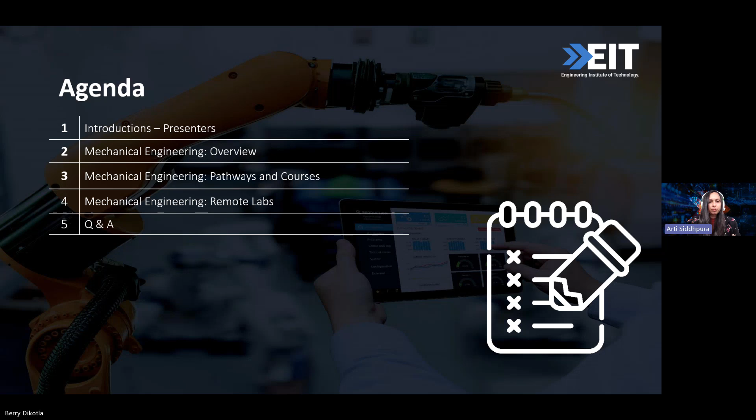Talking about myself, my name is Arti. I have been in academia for more than 20 years now. I have a PhD in mechanical engineering. I'm based here at the Perth campus of EIT, and my research interests are mainly about condition monitoring of machine tools, prognosis and diagnosis of tool life, and smart manufacturing and automation.

Over to you, Dr. Arvin. Hello, everyone. My name is Dr. Aravin Arumugam, and I am also a mechanical engineering lecturer, and I'm actually the program leader for the vocational education training here at EIT. Thank you.

Okay, hello everyone, welcome to this session for mechanical engineering. I'm Dr. Milind, one of the course coordinators and a senior lecturer at EIT. I'm also based in Perth. I've got a few years of experience in academia and industries, and I did my PhD in mechanical engineering, and I'm actually looking after bachelor's, master's, and doctorate programs in a way for EIT. So that's me. Welcome all.

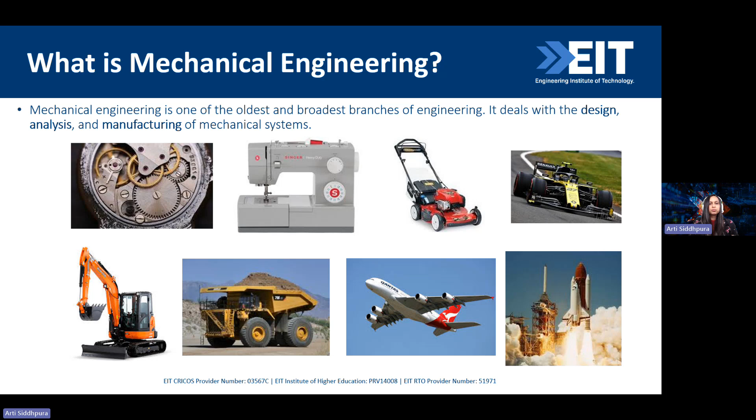We also need to have knowledge about manufacturing engineering, that is what different machines are and how they can be used for various different manufacturing processes. Mechanical engineers also need to have knowledge about engineering design, how they will design the parts and components so that they can withstand the given forces and stresses. They also use computer-aided design and simulation. Mechanical engineers also need to have knowledge of control systems, power and energy systems, kinematics and dynamics of machines. They also need to have some knowledge about robotics and mechatronics, heat transfer, and instrumentation and measurement. So these are some of the key knowledge areas.

As I already mentioned, mechanical engineering is a broad umbrella, it's a broad field, and quite a few different applications and branches sit under mechanical engineering. So we will go into a little bit of detail of all this one by one.

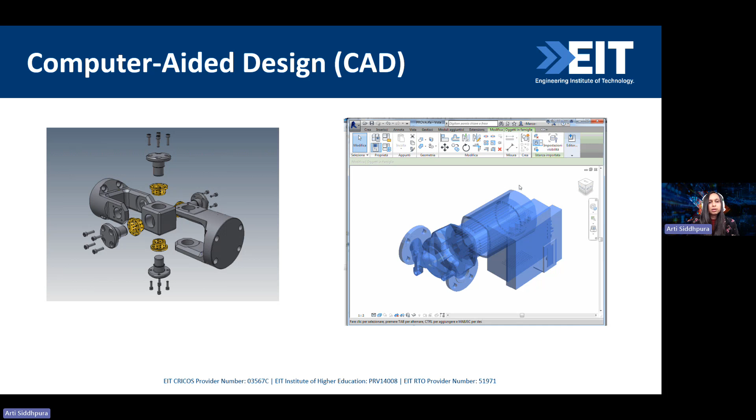Moving on and starting with computer-aided design. Mechanical engineers create detailed plans and blueprints for mechanical systems and products. Those sort of things involve selecting appropriate material, specifying dimensions, and ensuring system functionality, etc. So in doing all those things, computer-aided design software comes in really handy. They use these CAD tools to design everything from buildings to automobiles, helping them visualize the products, test the performance, and make necessary adjustments even before any physical work can get started. So that is computer-aided design.

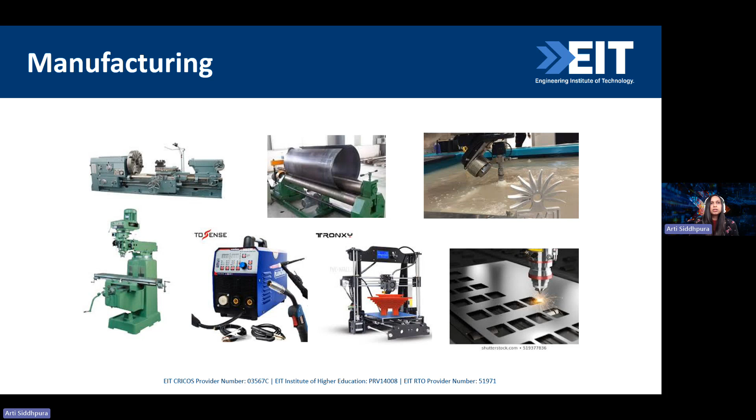Moving on, next application is manufacturing engineering. Manufacturing engineering is the process of turning raw material into finished products. Manufacturing engineers focus on how the products are made, ensuring that they are created efficiently and at very high quality. They also look for various different ways to automate and streamline the processes to save time and reduce the cost. Imagine an assembly line where robots and machines are working together to build a car. Engineers make sure that the entire process is very smooth, efficient, and produces really high quality vehicles. So that is manufacturing engineering.

And as we have been talking about cars, the next application is automobile engineering. Automobile engineering is a field where engineers specialize in designing, developing, and testing vehicles. This area is all about making cars safer, more efficient, and environmentally friendly. It's not just the cars which use fossil fuels, electric cars to advanced driver assistance systems, all those things are included as a part of mechanical engineer's job. So think about the electric vehicle you see on the roads today. Behind the scenes, mechanical engineers work on the engines, the batteries, and even aerodynamics. Now you should be able to see how various different key knowledge areas come into the picture. They need to select the most suitable material, design them so that they can withstand the forces, and again aerodynamics, thermodynamics, and fluid mechanics also come into the picture. So that is automobile engineering.

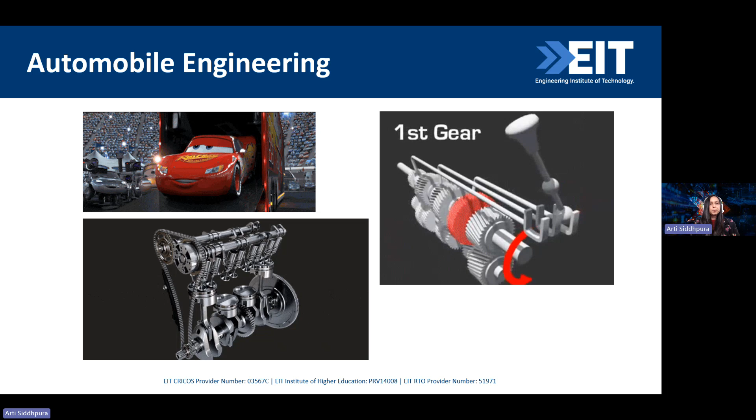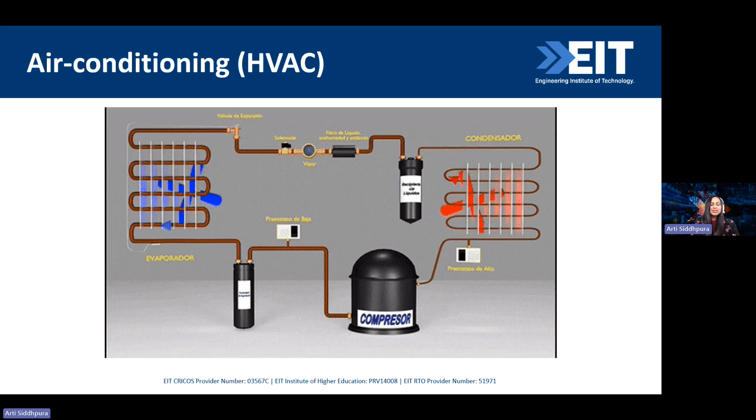Moving on, the next is air conditioning, or we fondly call it HVAC. HVAC stands for heating, ventilation, and air conditioning. Air conditioning engineering is a vital field, especially in our modern world where temperature control is very crucial for both comfort as well as for some industries where they need to maintain a certain temperature. Engineers design these HVAC systems to regulate temperature, humidity, and air quality inside homes, offices, even inside industrial plants. So when you walk into a cool building on a hot summer day, or when you walk into a warm building on a cold winter day, thank the engineers who designed the system that keeps you comfortable. So that is air conditioning and HVAC.

Moving on, materials. Materials are everywhere, and as engineers, when we start thinking about new products, we also need to start thinking about materials simultaneously. What sort of material are we going to use? Sustainability is another aspect now being added to material selection. So engineers have started doing an entire life cycle analysis, or if you like to call it, a cradle to grave entire cycle, starting from getting the raw material all the way to processing, converting that into the product, and all the way to disposal of that product.

So material engineering is where mechanical engineers work with various different types of materials. Those materials could be metals, plastics, composites. Every day, new materials are being invented; they are coming up with quite a few new materials every day. Material engineers focus on choosing the right material to create strong, durable, and efficient products, whether it's for buildings, vehicles, or even electronics. Everything requires material, and then all the engineers need to think about the properties of material - what properties are needed in order to make into a successful product. So imagine building a bike. Engineers choose materials that are lightweight, but again, strong enough to handle the rider's weight and the bumps on the road. So that is an example, a simple example of material selection.

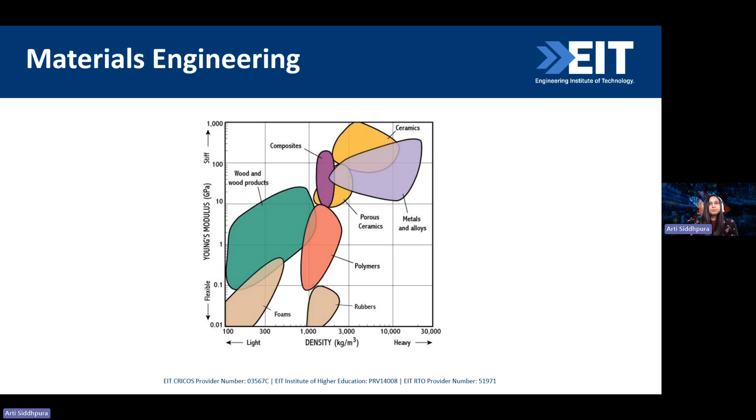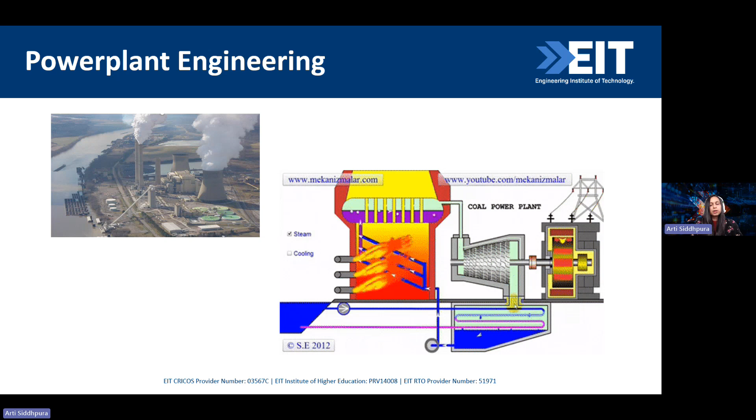Next one we have is power plant engineering. Power plant engineering focuses on generating energy. You might think power plants are more about generating electricity, but what do mechanical engineers do here? It's all mechanical engineering at the back end—whether it's a steam turbine or a normal turbine in a hydropower plant, it's all mechanical equipment. Engineers in this field design and operate power plants, whether running on fossil fuels, nuclear power, or renewable energy like wind or solar. This work ensures we have the electricity needed to power our cities and homes. So the back end is more or less mechanical.

Next is mechatronics and robotics engineering. This is a blend of mechanical engineering, electronics engineering, and computer science. Engineers in this field design robots and automated systems used in manufacturing, healthcare, and even exploration. Robotic vacuum cleaners are a very good example of what mechatronics engineers create. They design machines that can do tasks which are too repetitive or too dangerous for humans, and that's where robots and automated machines come to the rescue.

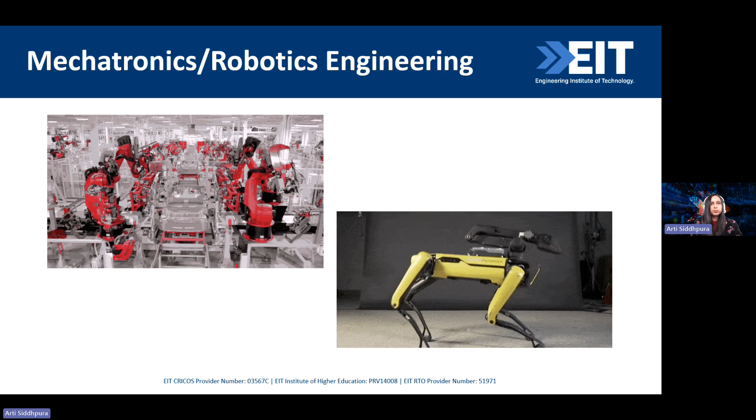Next one we have is agricultural engineering. You might think agricultural engineering has a lot to do with plants and crops—how would mechanical engineers play any role in this field? Agricultural engineering is an important area where mechanical engineers can work on improving farming equipment. Take Australia as an example: it has vast farming lands but very little manpower, so a lot of automation is required, where a single person can handle processes that would otherwise require a huge workforce. That's where mechanical engineers come into play—helping improve farming equipment, irrigation systems, and even the food processing industry. They can develop technologies to increase food production while reducing labor and environmental effects. So that is agricultural engineering.

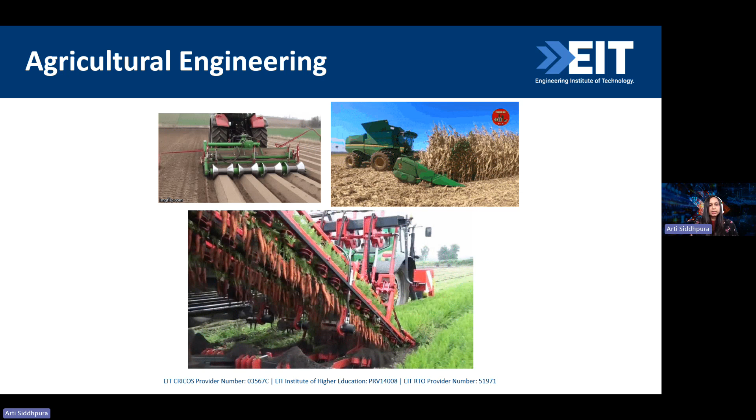The next one we have is mining engineering. It's quite distinct in its focus on the mining and extraction of minerals and resources. It's not exactly mechanical engineering, but it definitely shares fundamental principles with it. Mining engineering covers the design and operation of mechanical systems used in mining—drilling rigs, crushers, conveyors, material handling equipment—all have mechanical engineers behind them, whether designing, improving efficiency, or operating these instruments. Mechanical engineers design and manage equipment used in extracting minerals and resources from the earth, with a main focus on making mining processes safer, more efficient, and less harmful to the environment.

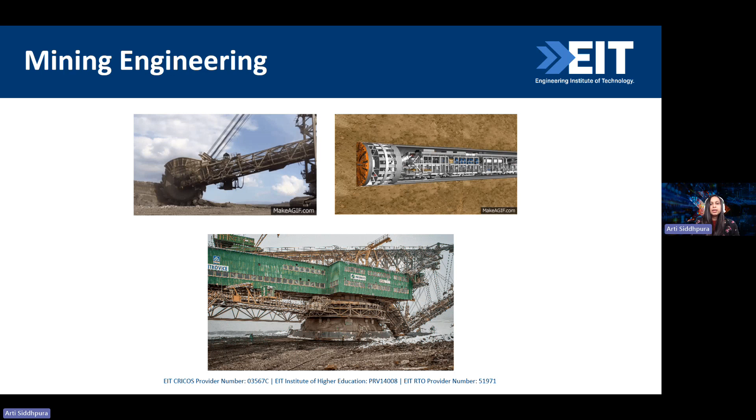Next one we have is oil and gas engineering. It involves designing systems to extract and transport oil and gas. Mechanical engineers in this field ensure that pipelines, drilling rigs, offshore platforms, and the numerous pumps and compressors used in oil and gas rigs, along with refineries, operate smoothly and safely, while also focusing on minimizing environmental impact. That is the key there.

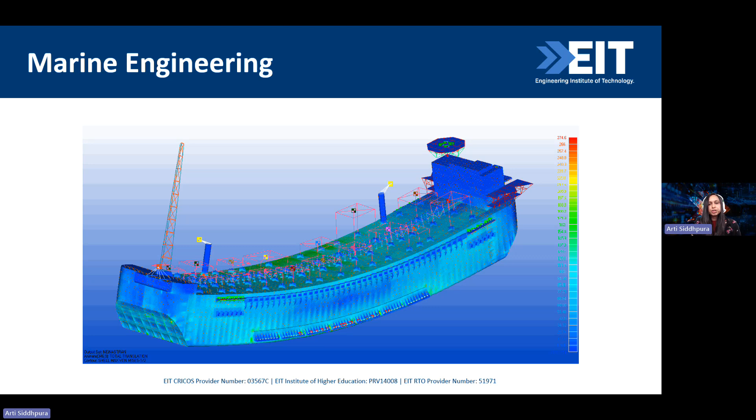All right, next one we have is marine engineering. This is the field where mechanical engineers work on the design and maintenance of ships, submarines, and other offshore platforms. They ensure that vessels and structures are seaworthy, efficient, and environmentally responsible—we don't want to pollute the oceans these vessels travel through. So that is marine engineering.

Last one we have is aerospace engineering—a field where engineers design and build aircraft and spacecraft. They focus on making planes safer, faster, and more fuel efficient, while also working on spacecraft that can explore beyond Earth. Many key knowledge areas come into play here: aerodynamics, fluid mechanics, thermodynamics, material selection, and design, all essential when designing a highly efficient aircraft or spacecraft. Spacecraft design is more challenging—imagine sending something to Mars, where you don't know what the environment will look like, what the temperatures or pressures will be. You can simulate it here, but once it's in the real environment, the outcome might be totally different. That's the application of mechanical engineering in aerospace.

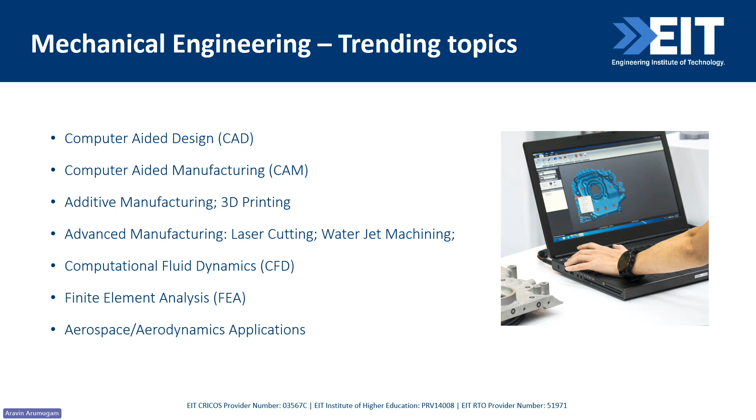All right, what else can you look into? Let's move on. Well, 3D printing. 3D metal printing, 4D. So we got this 3D, 4D. Now, obviously this comes as part of the, what they call this, generally the whole concept of...

Sorry, what is that? Can I have a quick look into? Sorry. All right, so 3D. So what's the difference between this 3D? Is there any sort of overlapping happening on the screen? Screen looks all good, you're on the 4D printing slide, Aravin. Is it? Okay, because it looks totally different. So can you just see the slides? Yes, yes, it's all okay, clear. All clear? Great, superb.

Okay, now anyway, coming back to what I was talking about, 3D, this whole thing about 3D printing. 3D printing is generally looking into creating complex structures using adding layers of material, layer by layer. So when you talk about materials, we obviously started off with polymers, and now we are also starting to look into metals and stuff like that. So we can generally build layers of polymers as well as metals in order to form any sort of products. So 3D printing is generally widely used.

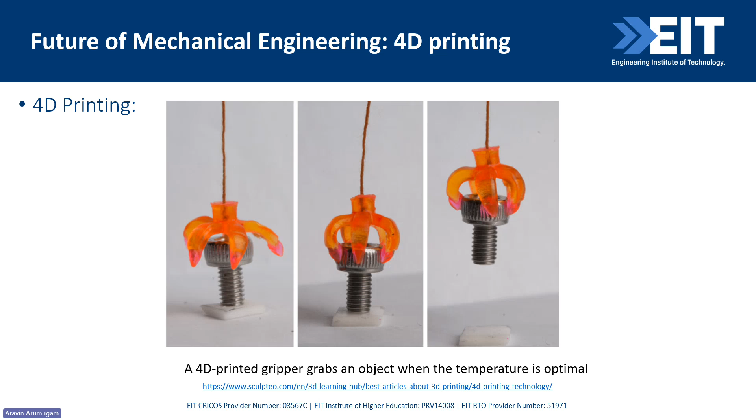All right, let's move on. So obviously the other part of it is computational fluid dynamics. Now this kind of falls under another big umbrella called computer-aided engineering. So we got computer-aided design, CAD, computer-aided manufacturing, CAM. So prototyping was in between those two. But prototyping used to be done in the olden days for testing purposes. Nowadays, hardly do we use prototypes for testing anymore because we have got these FEA type softwares that can do all this testing. One of them is computational fluid dynamics.

Computational fluid dynamics is a software that uses computers to predict liquid and gas flow using an equation called the Navier-Stokes equation. It relates the conservation of mass, momentum, energy, and so on. CFD simulation generally allows a designer to analyze the flow of air or gas so that they can optimize the design.

CFD is widely used in aircraft and automotive design. Another important thing is the integration of AI into CFD. With AI, these CFD models can be trained with historical data, so when developing another design, the AI can change the mesh, input, output, and so on, helping you optimize the design faster. So AI and machine learning are coming into CFD.

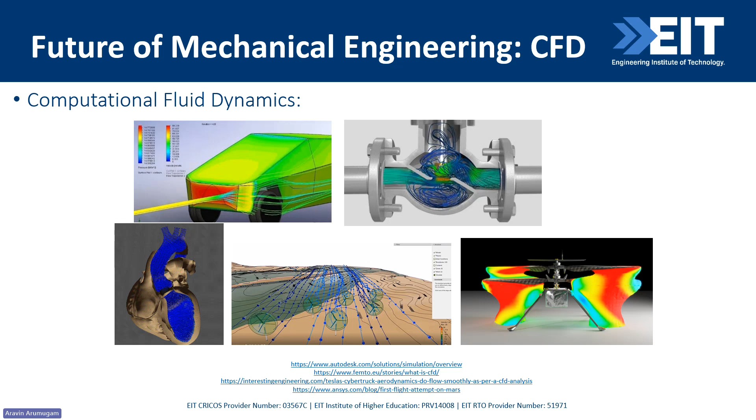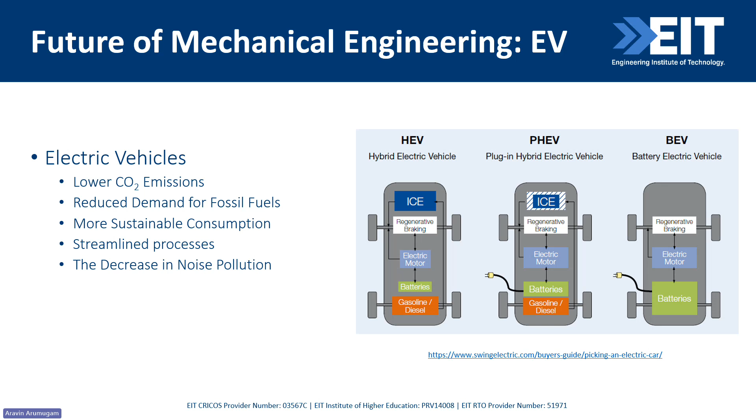What else? Let's talk about electric vehicles. Where do mechanical engineers come in, as Dr. Arti was saying? Mechanical engineers come in a lot with EVs because, as I said, they're needed anywhere there's transfer of energy. In EVs, you're talking about transfer of energy from electrical to mechanical and vice versa. So mechanical engineers are looking into the design of vehicles, designing the structures, the chassis, the suspension, the brakes. They are also designing and optimizing the powertrain involved in EVs. So that's where we have mechanical engineers again.

Nanotechnology is another thing Dr. Arti pointed out. Materials engineering is a big field of study in mechanical engineering. We have four engineering materials so far: metals, polymers, ceramics, and composites. But on top of that, additional materials are being engineered so we can incorporate them into nanotechnology, because we are already building components and parts that are quite small in size, in nano form, and we need materials for those kinds of things.

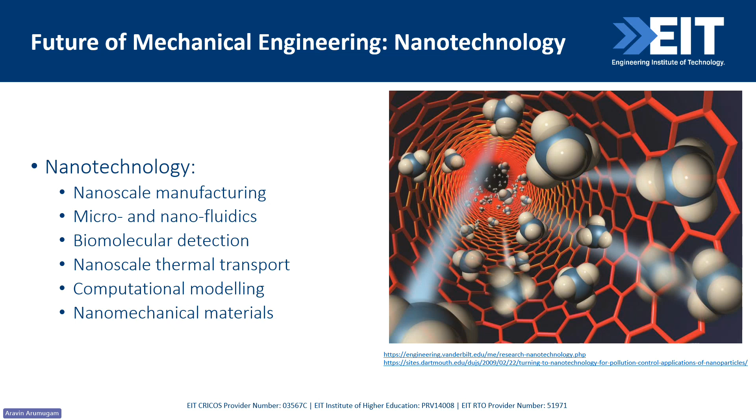Biomechatronics, something pointed out earlier, was a term coined by the Japanese. Mechatronics combines mechanical and electronics, but now we're putting both of these together with biology. We're looking into design of prosthetic arms, pacemakers. This requires a mechanical engineer, an electrical engineer, as well as another breed of engineers called biomedical engineers. They all have to combine together to look into biomechatronics.

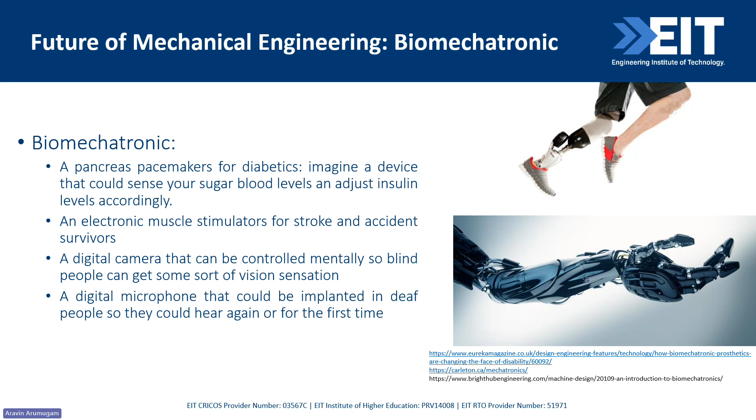Before finishing off, let's talk about Industry 4.0, part of the industrial revolution we're in at the moment. Going from Industry 1.0, 2.0, 3.0, 4.0, we're going through an advancement in technology. Industry 4.0 uses the Industrial Internet of Things, collaborating four things: connectivity with data, analytics and intelligence - that's where AI comes in - human interaction with machines, which is where you get virtual reality and augmented reality, as well as advanced manufacturing, which includes additive manufacturing, renewable energy, nanotechnology, and all this. We've joined all of this in Industry 4.0.

In fact, while I'm talking to you, we have actually gone into Industry 5.0. Industry 5.0 started in 2020, where we are talking about this collaboration between humans and robots. We are actually in Industry 5.0 instead of 4.0.

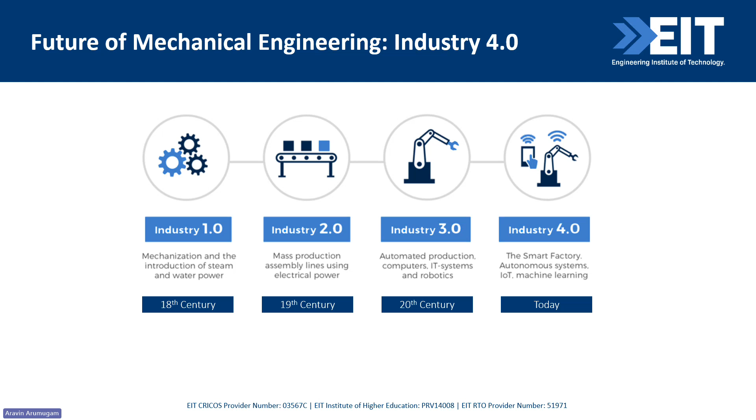Saying all of that, let me finish this off. There are some new technologies also we need to mention. The digital twin is in a way taking over the prototypes. Now we've got the digital twin, which is digitally formed, and that will tell you exactly how the actual product will look like. The input and output from the digital twin, and how it responds, can be used to change the actual system in terms of design and operation.

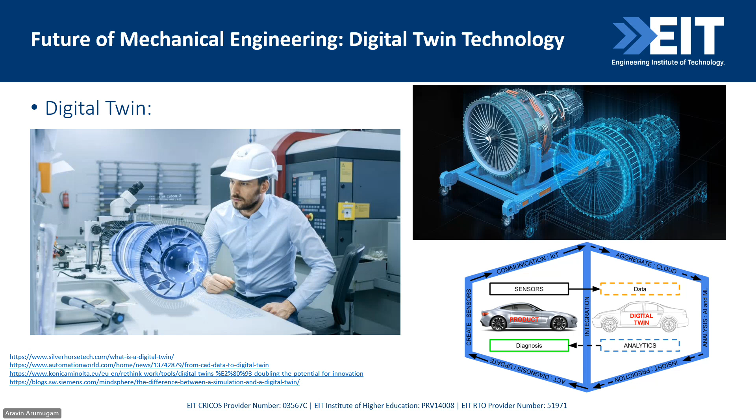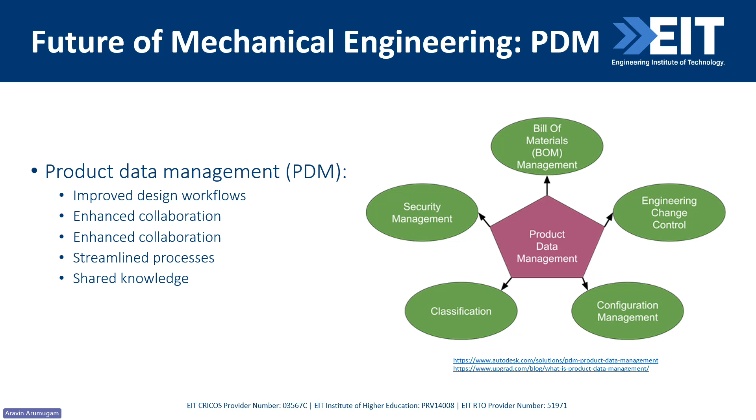Then we've got this integration of data, something mentioned by Dr. Arti earlier, how these various product data can be merged together seamlessly - PDM, as well as PLM, product lifecycle management. These are all very much software based. So to finish up, what's the future for mechanical engineers? The future for mechanical engineers is quite bright. It's very bright. There's a lot of things yet to be done.

We need to make transportation a bit more perfect - we saw SpaceX Starship recently with the vertical landing and stuff like that, a lot needs to be talked about there. Robotics also needs a lot of work, and machines for harnessing renewable energy have a lot to be mentioned as well. With all of that, I'd say mechanical engineering promises a lot of opportunities and prospects. So with that, I'll finish this off, and thanks for listening.

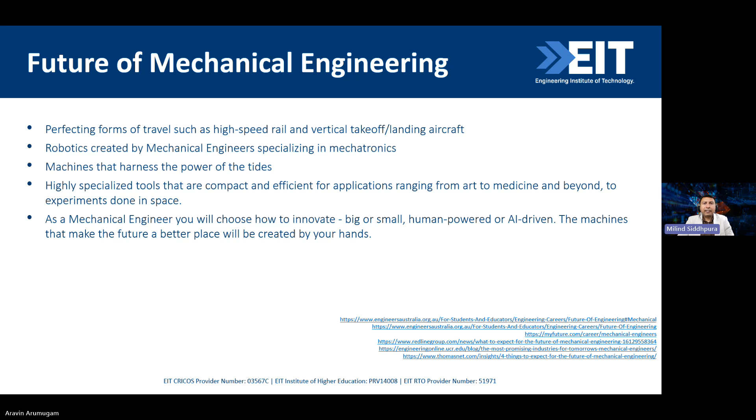I'm going to talk about the mechanical engineering courses you can pursue with EIT. Let me go through some of these courses - just give me a sec, I need to make this bigger.

Before I talk about the different courses at EIT, let me talk about the engineering pathways available. Anyone with a trade or technical qualification already working as a technician, for example, can take an advanced diploma if they have 2+ years of experience. Then there's a pathway to a bachelor's undergraduate certificate or a bachelor's degree, or they can go to a graduate certificate as part of a master's degree or a full master's degree, then a graduate diploma. We also offer the highest qualification, Doctor of Engineering.

So there are multiple pathways - either you could do year 12, then bachelor's and master's up to doctorate. We've got all possible pathways starting from diploma to year 12 to bachelor's, master's, and all the way to doctorate, so we can help you with your journey wherever you currently are.

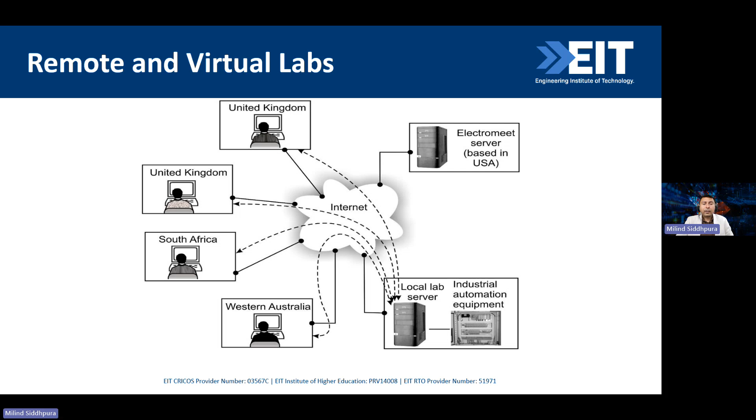For example, some of the equipment you can remotely operate and remotely do your experiments. There are web cameras fitted with it, and you follow certain steps. You can operate the mechanism, take the test results, and write your lab reports.

So the remote and virtual laboratories will not deter you - if you are sick on a day, you can't miss it, because even if you are anywhere in the world, 24/7, you can actually join these laboratories and do your experiments, and you can do it multiple times. You don't need to wait for one particular day or one particular time. That's the beauty of EIT's remote and virtual labs.